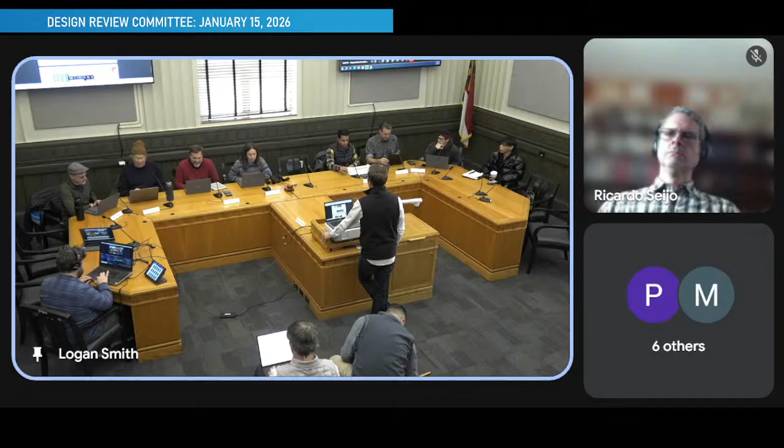Primary function is to perform design review for projects located in one of the city's 3 designated design review areas: downtown, the riverfront, and the hotel overlay zoning districts. This is a mandatory review, voluntary compliance process, with one exception for hotels seeking to skip council review. Hotels taking advantage of this incentive must receive a positive recommendation from the committee.

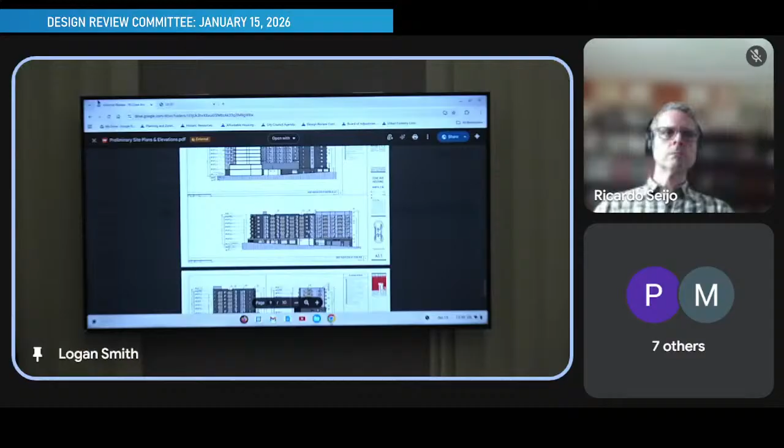I will informally refer to this as the 50 Coxe Avenue development, and I will speak very little about the development itself, and instead talk about where we are in this process before handing it over to Matt Card of Buncombe County and his applicant team.

So this is the informal review as noted by the chair. What had happened in 2024 is this had gone through the road right-of-way closure process for portions of Sawyer Street that you can see in the packet. This has not gone through that required entitlements process of initial TRC, Planning and Zoning Commission, City Council, and then back to final TRC. The applicants had indicated they wanted to appear before you to get informal design review before beginning that process so they can get a jump start on this.

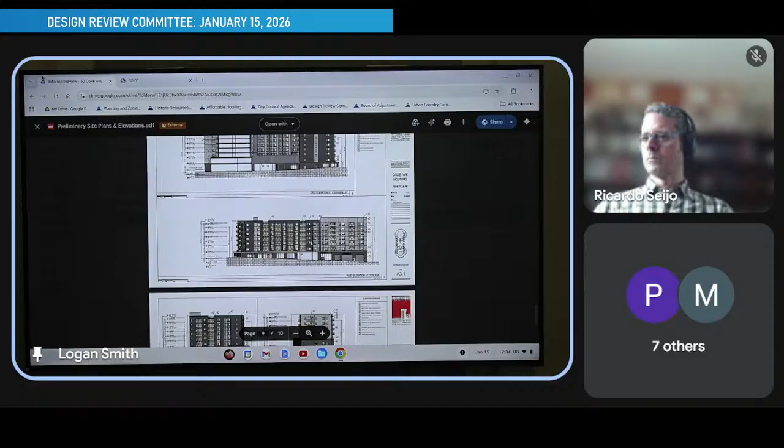And again, I just wanted to talk about this. This is downtown, which is in your purview. It is 200 units, as I had mentioned earlier. This is of particular interest to the city because 100% of those 200 units will be considered affordable at 80% AMI or less. Mr. Card can speak more on that, but this is what is before you. It is in that CBD zoning district and will have to meet all those requirements when they go before TRC.

So I will happily be your substitute liaison and provide code clarification if you have any questions on that. But for now, I will turn this over to the applicant team. Mandatory review, voluntary compliance, correct? Correct. Thank you.

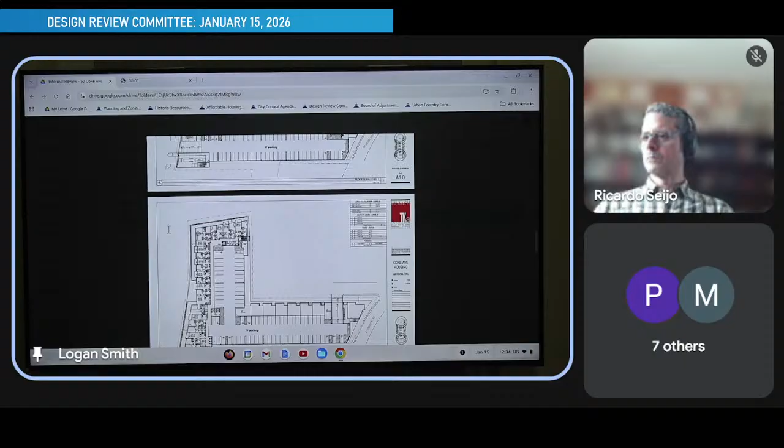Name before you begin, that would be great. Yes, my name is Paul Coons. I'm with Bolton and Menk, representing the design team on behalf of ownership here, Harmony Housing, and Buncombe County.

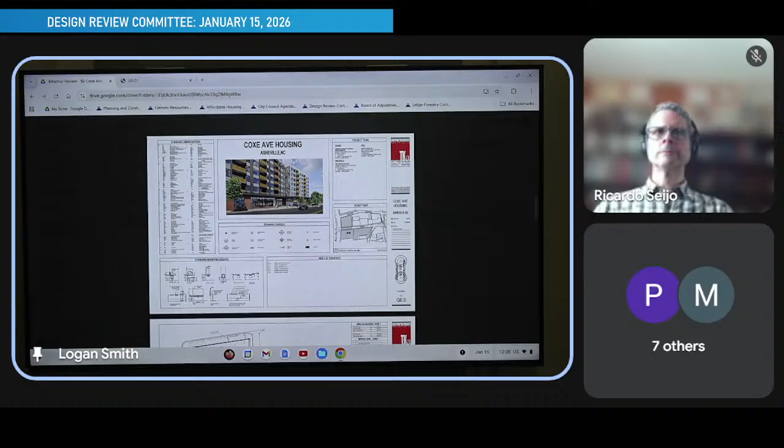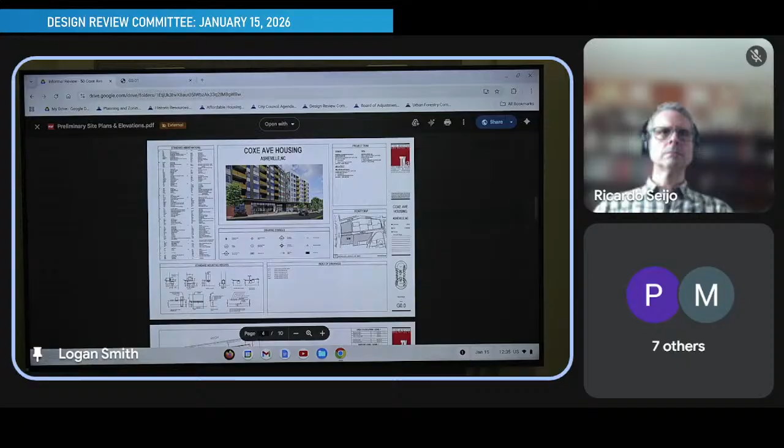So just to reiterate what Sam mentioned, this is a plus or minus 200 unit multifamily project with affordable housing. The percentage breakdown, as Sam had stated, I will quickly run through the site, and then if Tise Kiester, our architect, wants to weigh in, I will let them weigh in. So, sorry, it's a little small on the screen.

What we have here is a mixed-use building, including retail, community clubroom space, a lower-level plaza where we previously went through the right-of-way abandonment process on Sawyer Street, and ground-level retail also on the south side with 2 levels of parking that are internally not connected. There's a row of 7 townhomes across the frontage of Sawyer Street, and the second floor of the building highlights a playground and green roof.

Going along, I'll back up a little and start on Coxe Ave. In coordination with the Coxe Avenue Streetscape Improvements Project with the city, we're proposing a 12-foot sidewalk with trees and grates. There's a 0-foot setback along Coxe Ave, Aston, Sawyer, and Ravenscroft, but keeping within the required Build-to zone of the Central Business District. We are going through the TRC, DRC conditional zoning process, so being rezoned to the CBD-CZ.

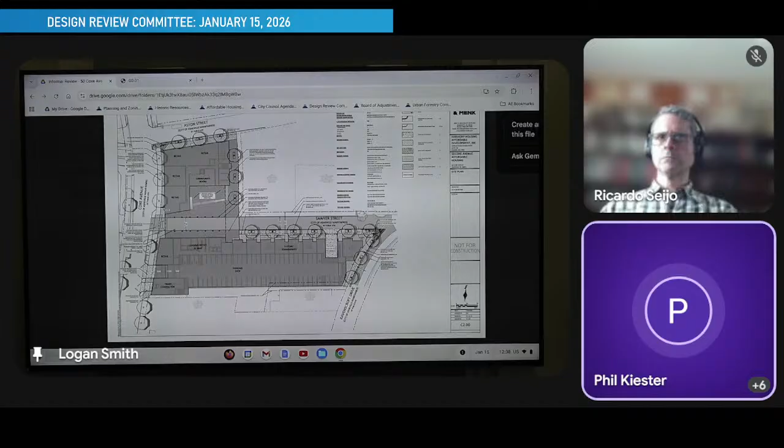This is Phil Kiester with Tise Kiester Architects. I want to thank everyone for the time today. Yes, this is an affordable project. It will be receiving tax credits through the state housing agency. We will have a mix of 1, 2, and 3 bedrooms, as Paul mentioned, approximately 200 units with associated community amenities located throughout the building. I think Paul did a good job explaining the program. Certainly, if there are any questions, we'd be happy to answer.

Before you proceed, can you describe any sustainable goals that you're trying to meet on this project, if there are any, regarding landscaping, stormwater, energy efficiency, anything like that?

From a building perspective, this project will meet Energy Star for multifamily as required by the state. All the lighting will be LED, very efficient, and all the appliances will be Energy Star certified. We will have an energy rater on the project who will be reviewing all the submittals and the design criteria and certifying the project at completion.

What are the plans to, I guess, which building are you talking about? Which building? Just south of, yeah, if you could zoom in. Yeah, where his cursor's moving. I don't know if we're able to pull up a Google Street View, but it's really, really close.

The old Oddfellows building, right. I have the old Sanborn map right here. Really pretty building, with a ton of windows on that side. So, yeah, I think that is definitely something we have not ignored.

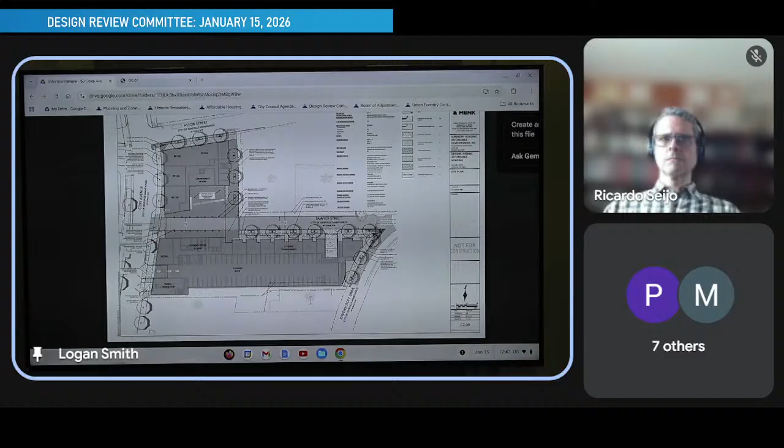We're currently in the process of coordinating with that landowner. I think that's something Matt here with the county is helping us spearhead, in addition to our ownership team. From an architectural perspective, we're currently ensuring we do our due diligence from a building and fire code perspective, but there is further due diligence and research we're working through to understand what that access easement actually calls for and what its intended use was.

That building does encroach into one side of the access easement, and I believe the overhang of the entrance does encroach into the property. So those are all things that the county and Harmony are working through with that landowner.

Another thing is the corner of Ravenscroft and Sawyer, where it rounds that sharp corner. I feel like that corner could be something somewhat special in terms of landscape, rather than it just being what it is, since you could see it as you're coming off Church Street. It's one of the first things you'll see.

Sure, I do agree. Right now it just kind of has a planting area, but there will be more detail there, and that's something we would intend to work with Harmony on, to see what their appetite is for enhancing that space.

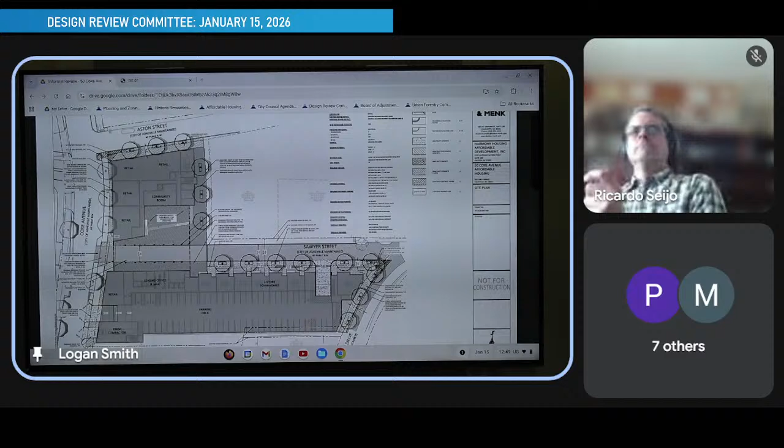And I think lastly, on this plan it doesn't show the grade change going east to west along Sawyer, with these front accesses to the units. I think in the architectural plan it shows steps in some of these as you're going down, so I'm assuming there's going to be some retaining wall planters holding up some of that landscape area.

To answer your question, if you go from Coxe Avenue up Sawyer Street, there is about 18 feet of grade change. You're down about 2155 on Coxe Avenue and getting up to about 2173-ish at the intersection of Sawyer and Ravenscroft.

Funny, or ironic, that you bring that up. We are currently working through our finished floor elevations of the building. I would anticipate some stairs coming off the front of those townhomes, possibly with planters and enhanced landscaping in the spaces available to do so.

Okay, just looking for more detail on what that might be, if those might be seat walls people can sit on, what kind of material that is. And it's great to hear that there's going to be a green roof, because that was, I guess, my final question. So thank you.

Kind of related to that, there's that elevated plaza adjacent to the retail, under the building. We're going to want to see what you're wanting to do with that space, how you're activating it, how you're lighting it. It's both under the building and to the north of the main bulk of the multifamily, so it's not going to get a ton of natural light. But it's still one of those public-private amenities we'd like to see more clarity on, how all that's going to work as you go forward.

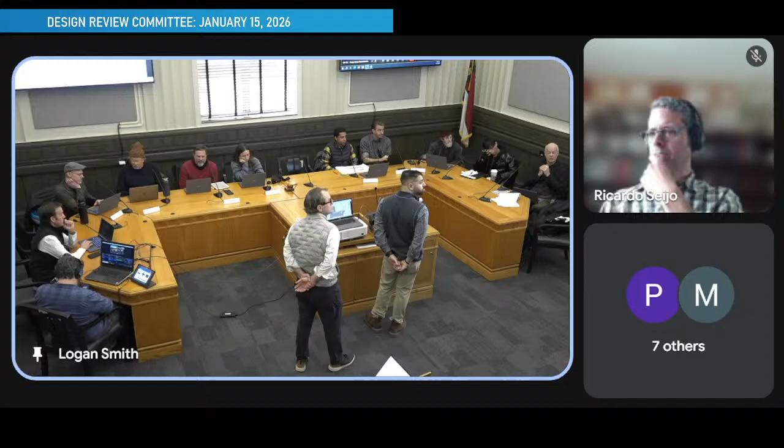I would encourage the architecture, there's a community room that fronts that covered plaza. If there's any way to slide that to the east to turn the corner from that covered plaza into the pedestrian alley, or slide that stair into the corner. Just looking at the architecture, the upper level plans, the stair could actually be at that southeast corner, which could energize that corner and address the pedestrian alley and the public space. Again, that's architecture, but I see a lot of potential for that space to be really dynamic, feed future projects, connect to Aston. Right now it's not working both architecturally and site planning wise. Thank you for indulging me on that.

Sawyer Street, the public, the private cars will be turning into the parking garage, but could they actually continue farther to the point where it becomes non-vehicular? Where's the demarcation line between where someone driving west would know they can't drive any farther?

That's something we're still currently working through. Where you see the driveway location on Sawyer, we did adjust that based on some public feedback we received during our neighborhood meeting. I think what's going to be key here is denoting this, creating or identifying this through highly articulated paving patterns and materials to deter traffic from going through there.

So technically, you don't want or need the cars to go any farther west, but there's nothing to say don't go farther west. But your plan will be that that's kind of where you want cars to not go any farther, correct? Past that driveway. Yes, that would be correct, and we're actively coordinating with Chris Cairns from Transportation on what that looks like. Yeah, that ambiguity is going to cause trouble. You either celebrate that cars are not allowed, or you accommodate the cars. Right now you're kind of doing neither.

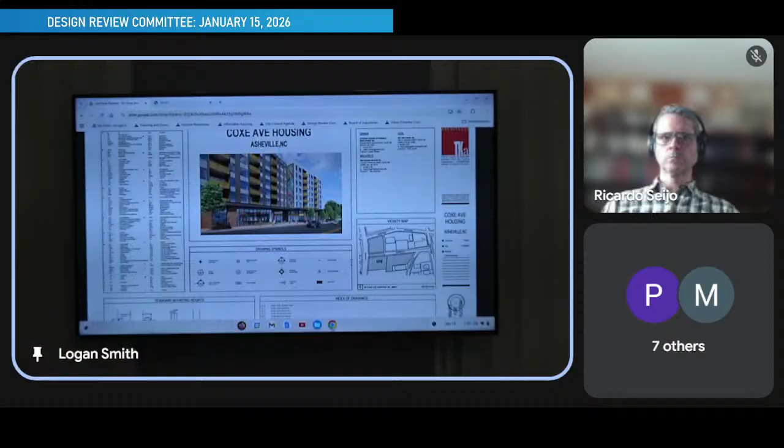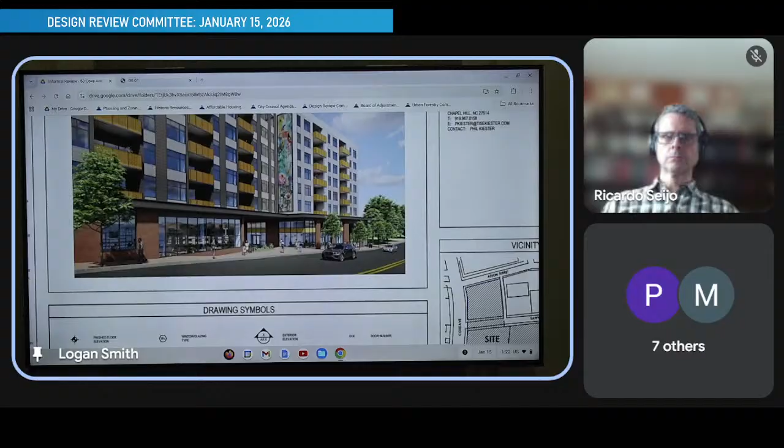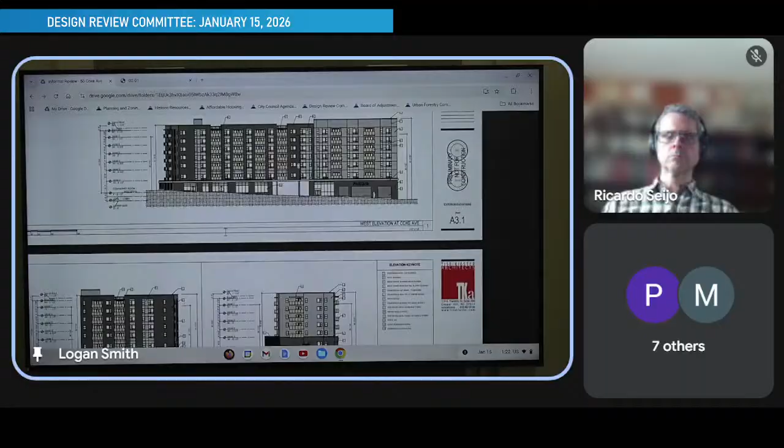Some architectural images to look at while we're discussing. I have some questions about the materials. It looks like on the rendering, and I'm guessing this is an old rendering because along Coxe Avenue it looks like glass, whereas now we know that it's garage doors or where the trash compactor is and the drive entry. But it looks like the material in this rendering is like maybe a fiber cement, that's the way it's rendered. And then on the other portion, it's kind of broken up. I'm just curious,

is it the rendering or is it the drawings?

Yeah, this is Phil Kiester with Tise Kiester Architects. I think the renderings were done as an initial kind of study for some of the aspects of the project that we wanted to convey and include in the final design. I think the elevations here that we're seeing now are more where the current project is.

I think to speak to the service entrances, I certainly appreciate those comments. I think we do have some constraints as far as those are concerned, and we'll certainly continue to study them. But I think, as you can see in this elevation, the Aston end of the building is not really appropriate for services, not for trash truck or things like that.

We have 200 units here, so I appreciate the comment about rollout carts, et cetera. That may be something we can take up with sanitation, but we don't usually see that on a project this size. Just the practicality of it, we would need a large yard for those and how they would be accessed. We certainly can study it.

But so if we can't really use the left side, the north end of the building, then that suggests that the services need to enter off the Coxe side, as Paul mentioned, just to get the height that's appropriate for those services, serviced by truck, et cetera. So there was a discussion earlier on. We did have the community meeting.

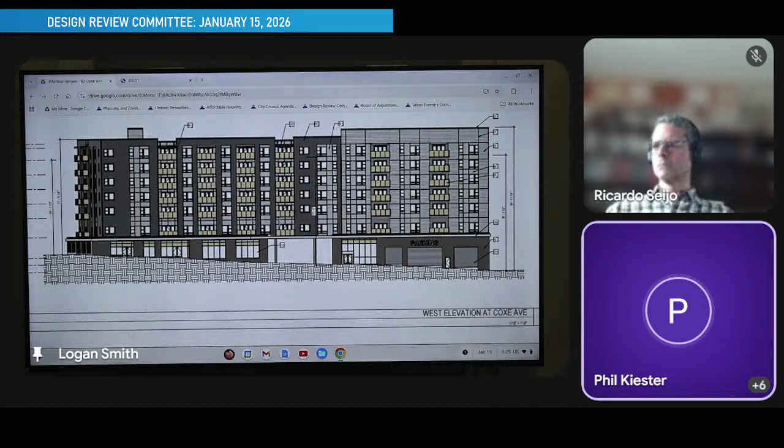Okay, I'd like to make a couple final comments so someone else can jump in. I find it strange to use fiber cement, like lap siding, in a downtown project. I know this is an affordable housing project, but I'd be curious because I think brick is quite expensive and you're using brick at the base. I wonder if you might switch entirely to other materials that are more appropriate. The brick is very appropriate, but because you can't use much of it, I wonder if there's another material that may be appropriate for the entire building, or two different materials, as opposed to using the lap siding.

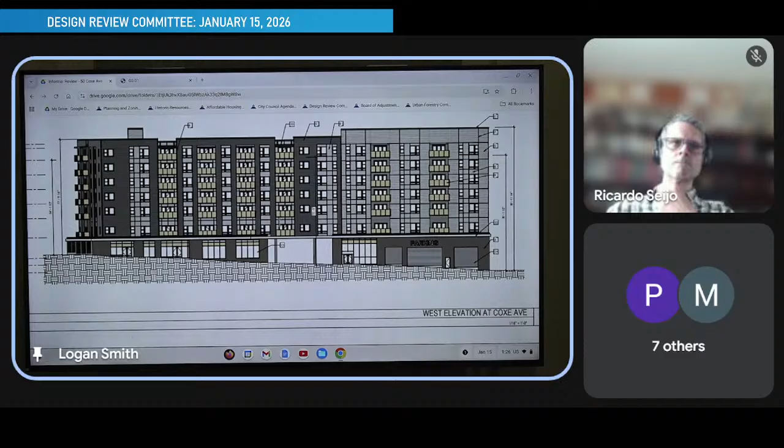You use the flat fiber cement, Nichiha fiber cement. Well, I don't recommend Nichiha either, but something along those lines. Certainly, yeah, I appreciate that.

I think, again, we're getting into the materiality of the project now. I think additional masonry certainly could be accomplished. We have to work with Harmony and their team on budgeting, of course, but we want to certainly develop something that's compatible and appropriate for Asheville. So we certainly can study that.

Thank you, I want to amplify everything you guys are saying. Those are all good. And again, this drawing here, to me, kind of reveals the problem. That right side of the building is just harsh, and that's where the architecture comes in, to kind of solve those problems gracefully. Architects love carving holes in buildings, so I think it's pretty cool that there's a hole that's pulling you into a space. I'm excited for you to explore that opportunity.

To the right of the pedestrian hole, there's a pair of doors. Apparently that's the entrance to the building, the only front door to the apartments above that I see. I guess you're being pulled through the hole and into that elevated platform and then brought into a lobby to an elevator. I would encourage you, part of the design guidelines are to use traditional cues, like people live here, this is the door they come through, and announce that there's a front door and people go through it. All we're seeing right now are garage doors and trash doors and a hole in the building, so work a little bit harder on that.

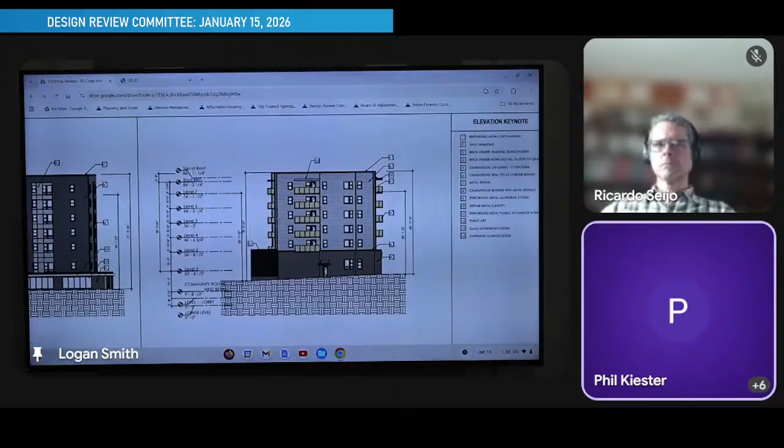Phil Kiester again, thank you so much for those points. Just so the members are aware, we do have a resident playground on the 3rd level of the building, above off Sawyer Street, above the perforated metal art area there. I don't know if the renderings were shared again, but we'll certainly work with Paul's team on animating the space itself for additional amenities.

Including some teasers as you walk by and look in that opening, try to spill some things down so you start to read, and you're kind of tempted to walk under the building, which is something I'd do. Yes, sir, thank you.

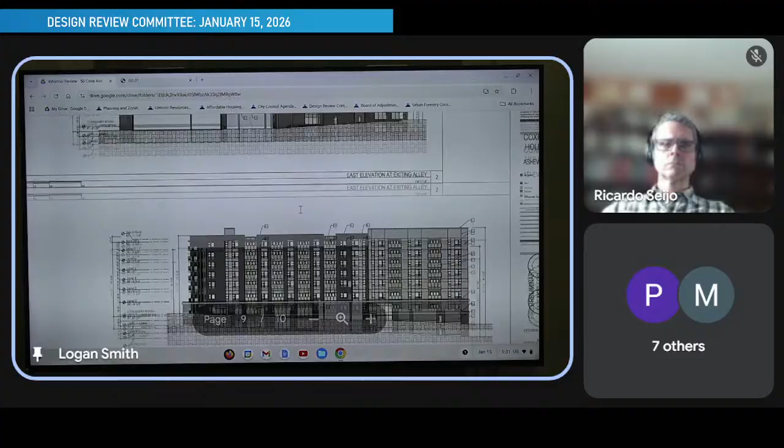I'm going to give everybody a chance to speak. Any other comments on the architecture? One last thing, at the very south end, this is a footprint thing, there's like a 4-foot gap between the building and the south property line.

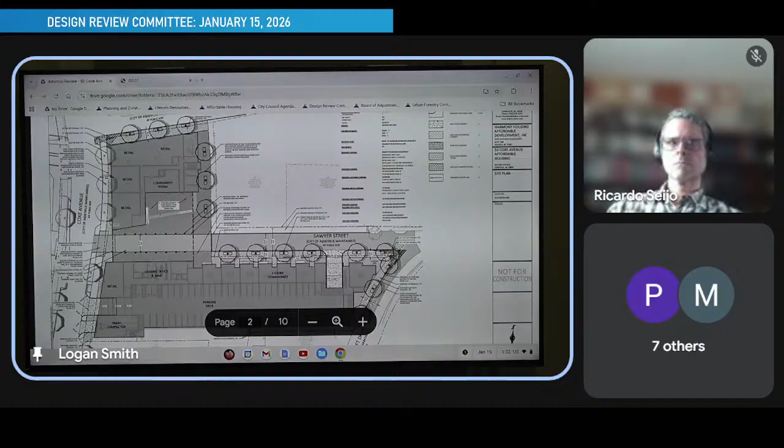There's a stair in the back corner. Where the trash compactor is, the building is held off that property line for probably valid reasons. There seems to be maybe a door there where the stair is. Can you go to the architectural plan, since it's more current? It shows the stair in the corner, and then there's this kind of brutal hallway to get out to the street. Again, that's an egress thing, I get it, but...

God, I would hate to have to walk through that, down that stair and out that hallway. So maybe there's a way to rotate that stair 90 degrees, and maybe there's a way to explore that you could exit. I think the issue there is that you have to exit to the pedestrian way.

Phil Kiester again, thank you for bringing that up. That alludes to a challenge we're having with the building right now, which is consideration of the building as a high-rise. This is an affordable project, and we're trying to do everything we can to get away from the high-rise designation because it has significant financial and design impacts. I agree with you on the hallway. I think the interest there was to try and get fire access at a point that would qualify us to get under the high-rise requirement of 75 feet.

We do have the opportunity, if just for egress, to come out on that south side and move along the property line to egress. There are some challenges there from a fire separation standpoint, but just to give you background, that's why that corridor was established as it is—certainly still under design—but we're trying to get under the high-rise requirements, and I'd ask that any help we can get from this group would be a benefit in that regard. Currently we're about 2 feet over.

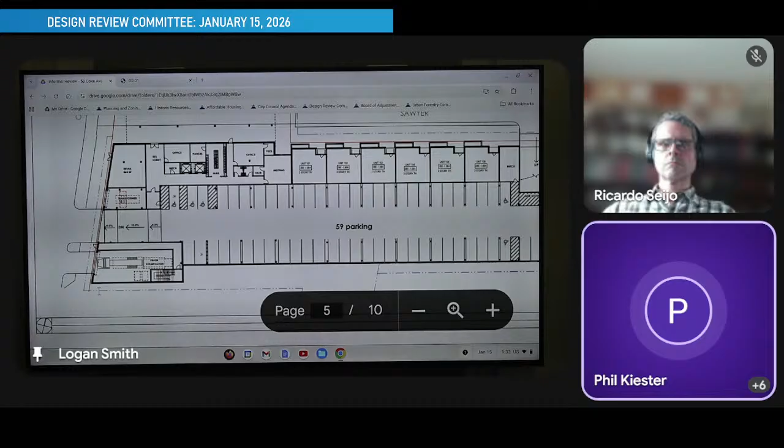Agreed. I'm a stair guy, so it seems like everything is designed to encourage people to use an elevator instead of encouraging them to use stairs, and this is another example of that. Who the hell would want to use that stair? You're going to use the elevator because that's so brutal. So if there's any way to encourage people to use a set of stairs to get from their apartment down to the street, that would be awesome. Same thing on the other one—potentially welcome and encourage people to use the stair instead of the elevator. Yes, thank you, agree.

Carter, you're being entirely too quiet. You guys are covering everything.

Well, I'm more excited about this project. I'm grateful for the county taking the lead, and for engaging a designer to help flesh out the challenges and start moving towards a solution. So keep it moving. I second that.

I have two more site questions. This kind of just arose as we were going through this, going back to the Sawyer Street to private drive transition.

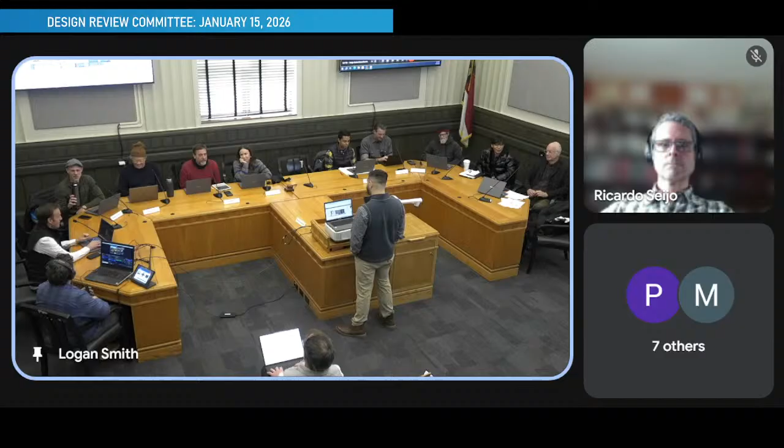Well, I'm pretty sure Jared Wheatley's office is right beside it, so if you don't put something there, it's going to get tagged. I'm just telling you, probably a cool tag, but still it's going to get tagged. Anyway, I think it's worth talking about.

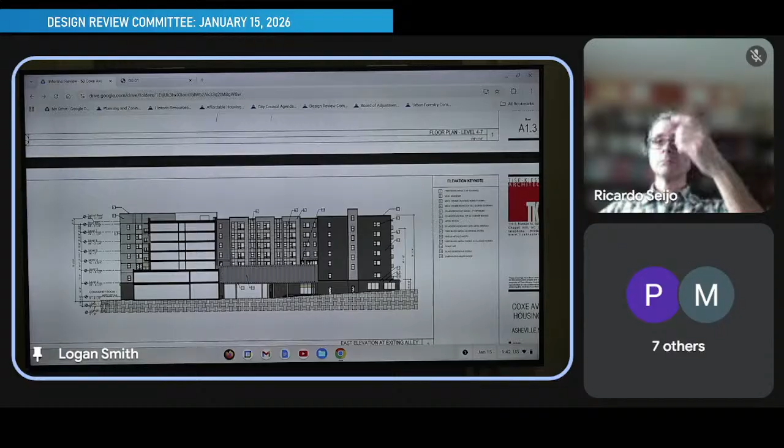I think that's a really significant opportunity if you're going to identify it like that. And the DRC would not be involved, that's not our purview, there'd probably be a different place for that. But because it's integrated into the architecture, at least the parameters, I'd like to know more as you go.

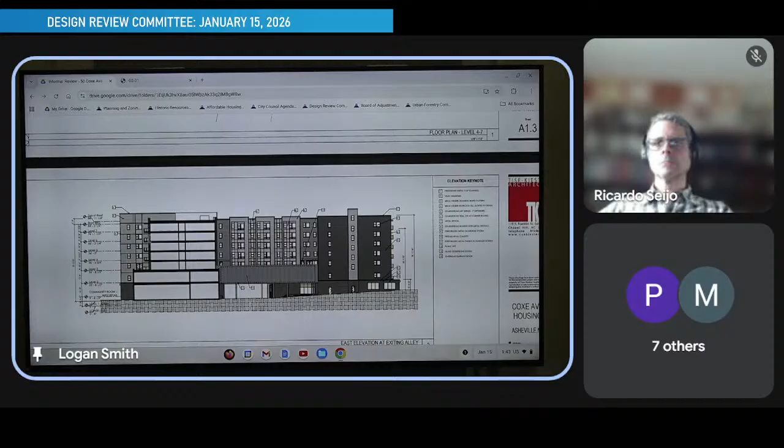I mean, in totality, imagining having an enhanced alleyway, this is the alleyway coming from the right to the left. You have an enhanced alleyway, like Michael had mentioned, if you were to wrap the community room with large windows on that corner there, and you had a mural or some sort of artistic piece on the top, and you had landscape above that, that's a scene. So I would encourage that direction.